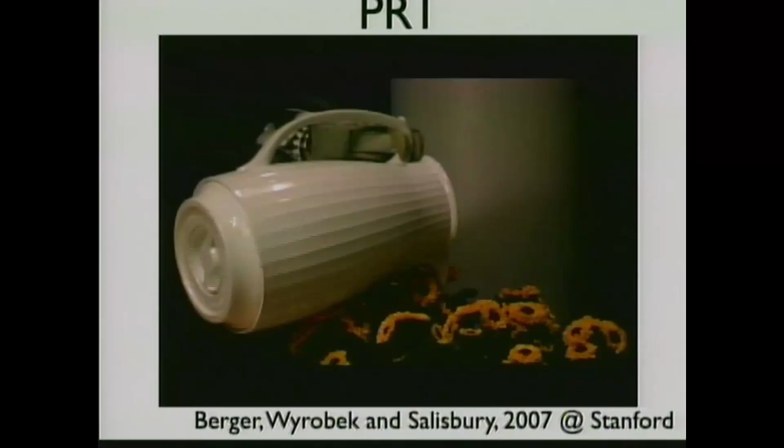So this is an early personal robot. This is actually where we got started in personal robots. This is a robot at Stanford. That was Eric Berger, and in a minute you'll see his partner Keenan Wyrobek. They were in Ken Salisbury's lab over at Stanford. And this is a robot that was created to be a platform on which you could develop software. This is, again, 2007, so about 5 years ago.

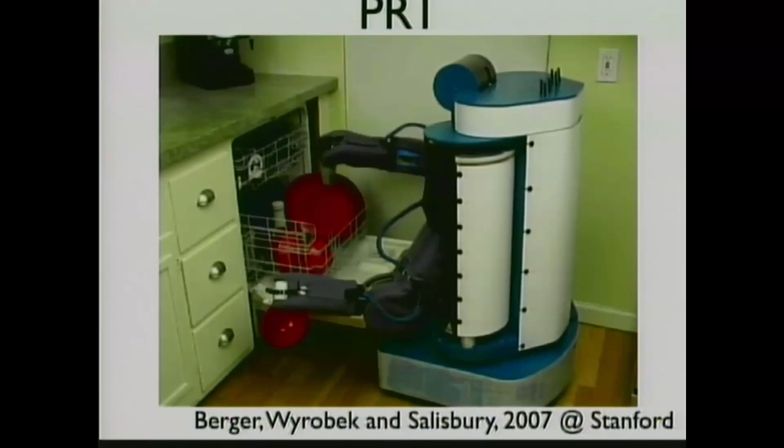And the idea behind this robot - let me say something about it first. You're seeing the robot doing all kinds of humanoid things, so it's practically ready to take over the world. It's actually not. I wouldn't worry too much if I were you.

This robot - this is sped up - was being driven by Eric in the same room. So it's teleoperated, but not only teleoperated, it's same room teleoperated, and that matters a lot. Because situation awareness, if you're trying to teleoperate something 2,000 miles away, is really different than if you can actually hear the crash when you knock something over. And so Eric was teleoperating this.

This, coming up, by the way, is the world's laziest grad student in the most important task any robot can do, which is to bring you a beer.

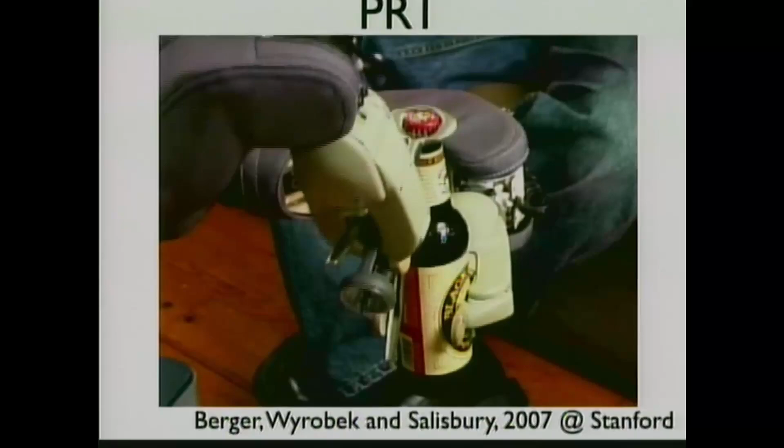This robot was created out of plywood. I have this robot in the lobby at Willow Garage. It was made with laser cut plywood in order to quickly prototype what you could do in hardware. The robot is not autonomous. We call that the PR1. They didn't call it that at the time, but when we named the PR2, we needed to name this one something, so we back-named it PR1.

The vision here was to create a catalyst for innovation. We're trying to create an industry.

The idea that Eric and Keenan and Ken Salisbury had was that in the worst case, this was typical of a robotics PhD program: you cobble together hardware, get motors, get a robot base that some previous grad student built, and figure out how to make it work again. You add an arm if you can. You come up with software, cobble together some open source software, write your drivers. Four years later, you haven't invented anything in robotics, and now it's time to start thinking about your thesis, so you do a little innovation on top of that platform, and then you graduate.

We wanted to invert that. We wanted to make it so you start with a robot that works, software that works. You spend a little time learning it, and then you spend most of your PhD thesis innovating, getting papers out, and making the field go faster. We thought this approach would actually speed things up.

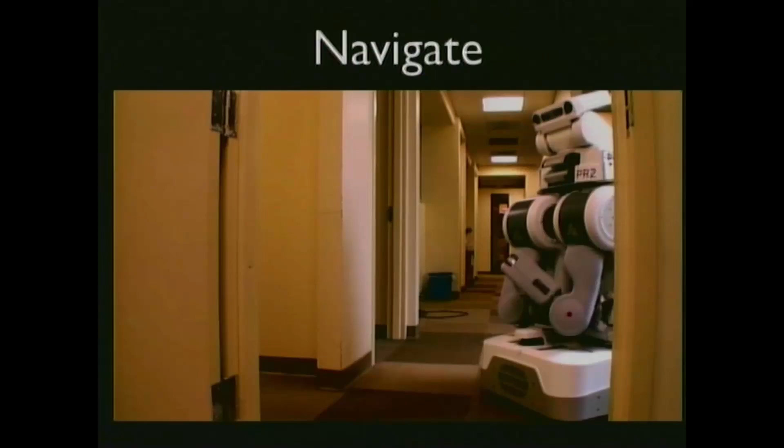Let me show you a little about what these robots can do. Navigation is a fundamental capability for a mobile platform, a mobile robot. Here you see it doing a little test in order to get a paper accepted, so they put some coffee cups on the floor. The robot is running completely autonomously.

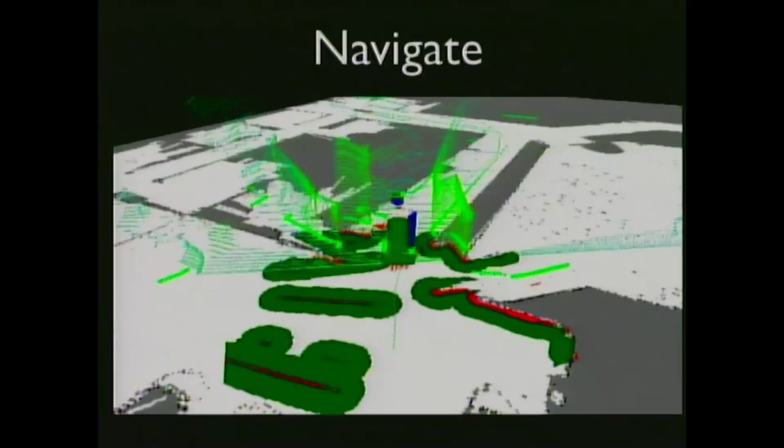We did a milestone at the beginning when we first had the robots moving: can we go 2 pi kilometers? So pi kilometers one day, recharge, next day do pi kilometers again. We thought that would be pretty good. We later did a whole marathon, and that was another task we wanted to accomplish.

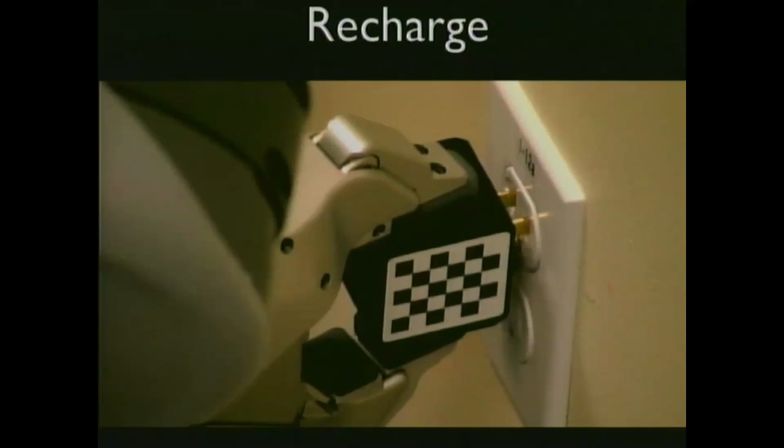How do you know that the arms work? Well, let's see if we can plug ourselves in. So the robot learned how to plug itself in. Turns out plugs aren't designed to be plugged in by a robot this often, so the robot does fine, but we often have to call in an electrician to replace the outlets. Nevertheless, it can recharge itself.

This robot is designed to be ADA compatible, so it goes where wheelchairs can go. It's about wheelchair size, and you don't want it to fall over, so it's this big, and that's kind of big. If you get 9 of them in Willow Garage, they would pretty much fill this stage. They take up space.

So you have to actually think about where you're going to park these things. And you have to plug them all in, and they all suck 15 amps when they first get plugged in, so they have to all be on their own circuits. So we end up putting in a circuit for each robot and a parking space, so there's always a place for it.

With this capability, with navigation and with plugging in, we were able to do what we call continuous operations. We pushed the robot last year to 140 kilometers over 2 weeks of operation. Nobody touches the robot, it goes around the building. We don't engineer the environment in any way, we just ask it: don't hit anybody, don't hit anything. And so it's actually pretty cool.

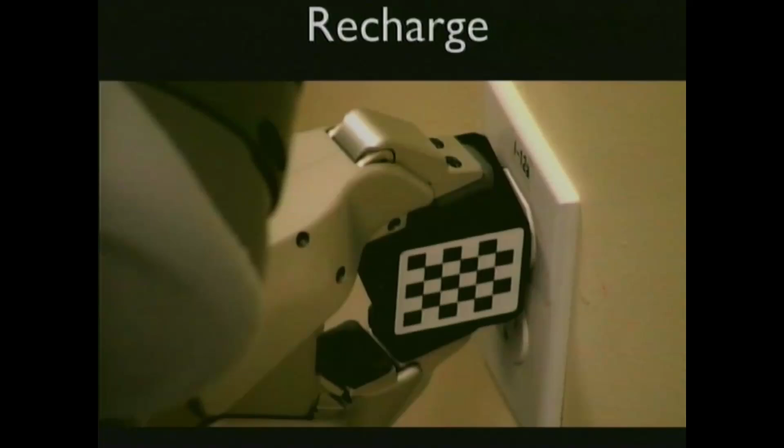The robot's going along, and you jump in front of it, and it stops, or it goes around you. Plans around you. If you block its way, it plans a different path, and so forth. And so it looks intelligent, right? Well, it's not intelligent. It has an algorithm that says the same thing I tell my 16-year-olds learning to drive: don't hit anything. That's the rule. Sense the world, don't hit anything, and then go. And then there's algorithms on top of that to keep track of where you are, plan a path to where you want to be, and then navigate. So that's pretty much what the robot does at the navigation level.

We wanted to see what else we could do. Once we had this platform, this hardware and software platform, we wanted to see what the robot could do, so we gave our team a challenge: you have 1 week to make the robot fetch a beer from a fridge. And so this is what they did.

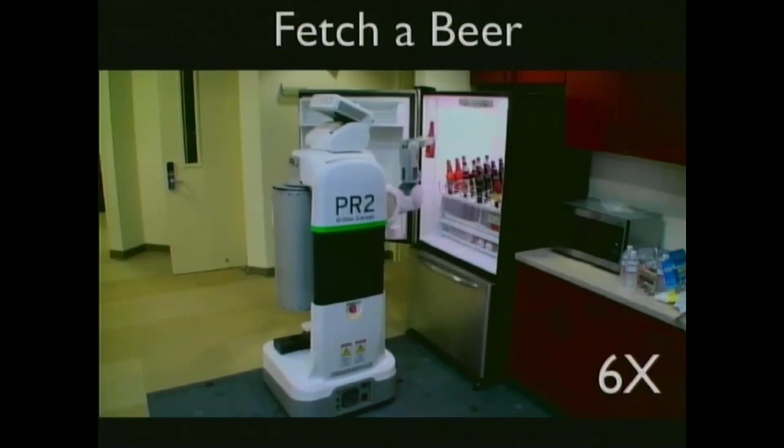They built a web interface. If you select a Guinness from the web interface, it'll choose a Guinness from the refrigerator and take it to you. If you choose a Bud Light, it'll ask you, are you sure you want a Bud Light? And if you say yes, it'll bring it to you. The team added a little cup holder so it can hold the bottles. It also makes sure to close the refrigerator securely—another good thing to teach your kids.

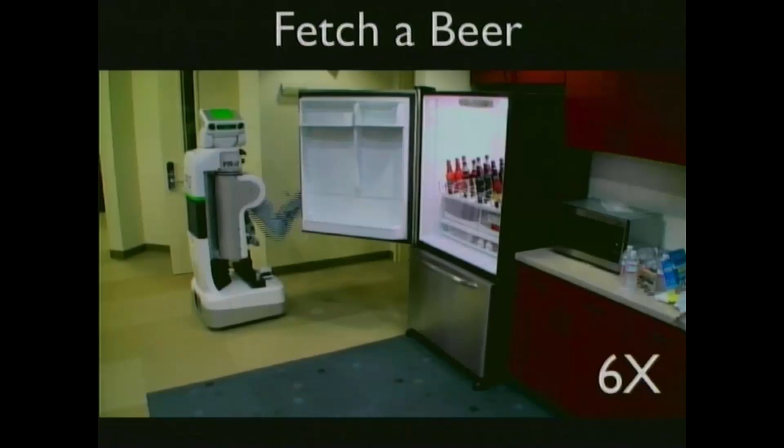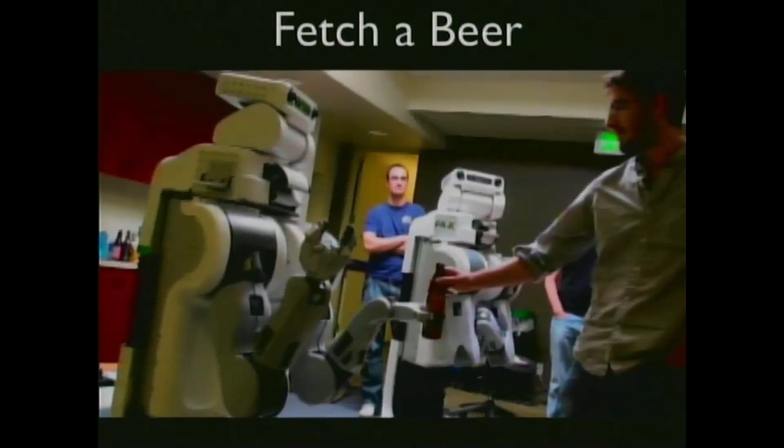This is all just kind of rote programming. Once it knows where the handle is, it just goes through that entire exercise, including finding the right beer, then uses the navigation capability to bring it to somebody, and then handoff. The handoff is actually also hard, because the robot has to know when to let go. So you start talking about robot interaction—that question of when should I let go of the beer. If you let go too early, it's not good.

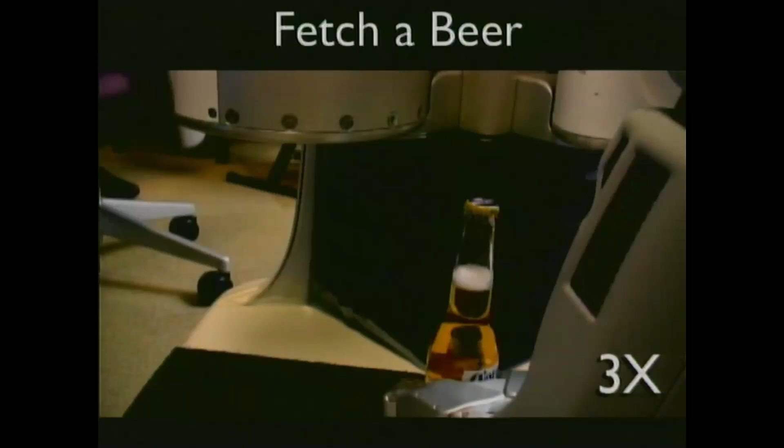This is the same behavior you saw in the PR1 video, but this is autonomous, although not robust. And here's Eitan making a mess.

So we created this hardware, and I'll show you a bit more about the hardware in a bit. We also created this software called the Robot Operating System, or ROS. And the interesting thing is, this is a little old now, but there were 92 repositories by the end of 2010, maybe beginning of 2011, and that's continued to grow.

Those repositories each represent a place in the world, like a university typically, that is creating open source software and contributing it back. The model we had was: we don't want to own the open source software, we want to create this ecosystem of robotic software, and academics need to get credit for what they create—that's part of the deal in academia. So you create a repository, put your software in it, and just tell the ros.org community indexer about your site, and the indexer will go through and make it available to everybody else. That works across our software and lots of other community software, so well over 100 repositories now.

And remember I said we gave away 11 robots, right? So there's us plus 11, that makes 12. That means there's a lot more people using this, and they're not on our robots. And we did, at the end of 2010, start selling robots. We've sold probably twice as many as we've given away, which is not a lot in the scheme of things, but is a lot in terms of the number of great robotics universities in the world.

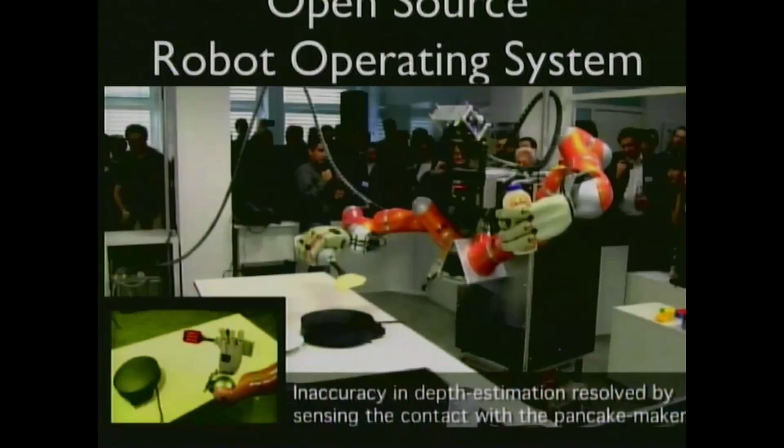This was our robot, the PR2, at the University of Pennsylvania, playing music. This is another robot - those orange things, those orange arms, are called KUKA lightweight robots. And this was an example from Munich, making pancakes.

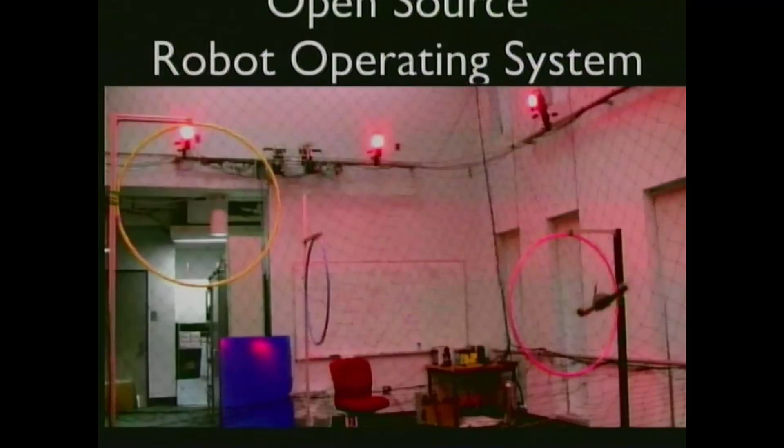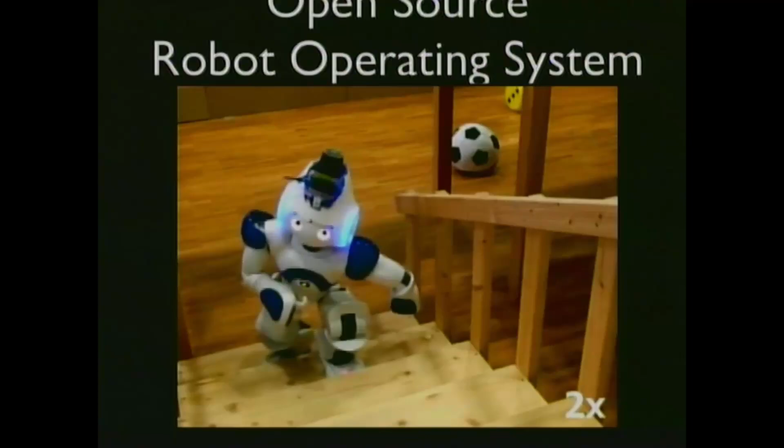Here's robots at the University of Pennsylvania, quad rotors that are doing really cool things with ROS support. This is another arm from Stanford that's made out of plywood. Stanford does things that are not in plywood too, I'll just point that out.

These are PR2 dancing with a robot from Germany called the Care-O-bot. This is a robot that's designed to go in tubes and clean out pipes. This is a car, an autonomous car that's running ROS.

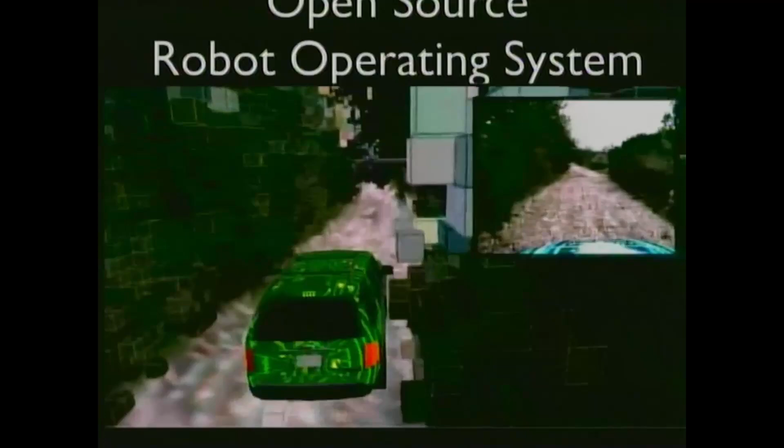You can see some of the visualization tools that it was using in this example. This is a surfboard - the surfboard's not technically a robot, it's hard to know what a robot is, but that's not one. But they put an accelerometer on it and then used the ROS tools to see.

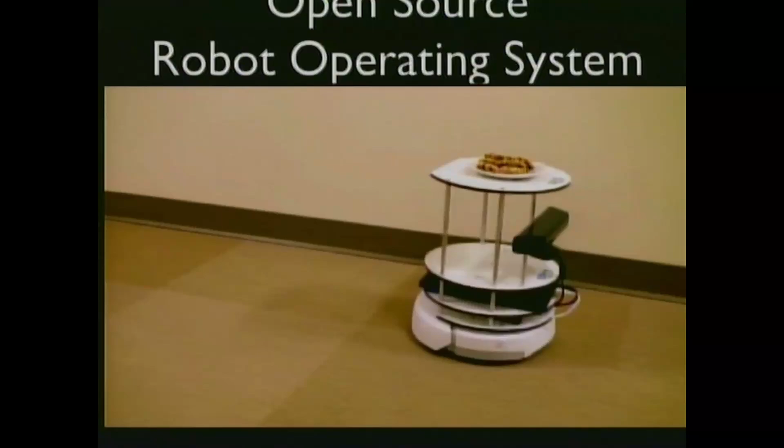This is a TurtleBot - so this is basically a Roomba with a Kinect on it. I'll show you that later a little bit more. Lego robots. This is a PR2 again, and a robot called El-E from Georgia Tech. This is one of those home-built robots, but with a commercial arm designed for research labs.

These are servo bots. A lot of times you see little tiny robots made out of airplane servos. There's a lot of robots in that category, and they can run ROS. So you get an idea.

I need to update this video, because there's a lot more robots, and some of them are really interesting. Like somebody built an artificial rat with whiskers that runs ROS, and I thought that had to be on here.

So Willow Garage as a company, we started 5 years ago, and our idea was, let's be a catalyst to create this new industry. And as I indicated, ROS has been really successful, the robot operating system. The PR2 has been pretty successful too.

Where we want to go now in the next 5 years is, how do we get robots in use? How do we get robots out there among people doing more things? Obviously cost is one big issue, and we're working on that, and lots of other people are too. But I want to give you a little bit more sense about robots and where they might be useful, and what we can do today, because there's a lot of misperceptions about robots.

You know, I hear a lot, and I get asked a lot about our coming robot overlords. I don't really lose any sleep over that, because I get to see robots in the world doing things.

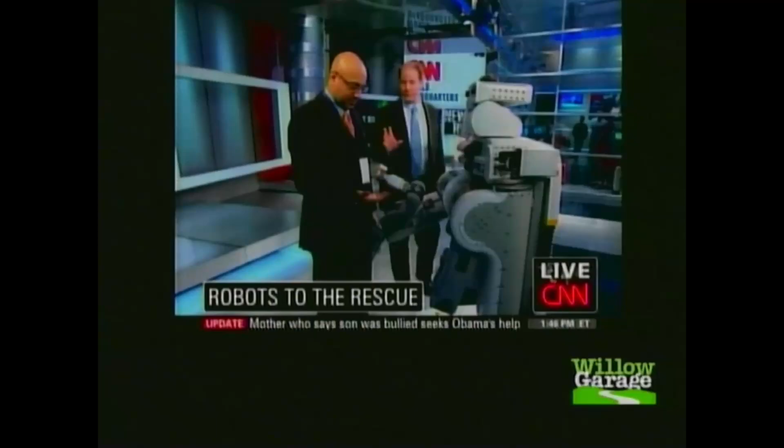But he saw this CNN clip with a PR2, and he said, you know what, I can use that robot to be my external body, to replace my worthless body, as he puts it, which was really exciting.

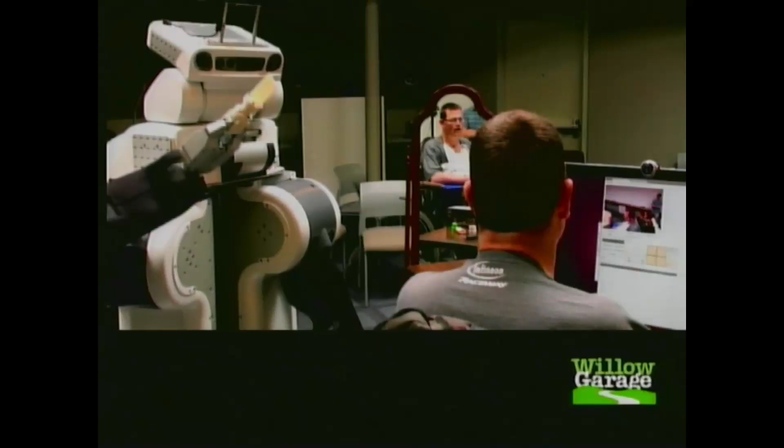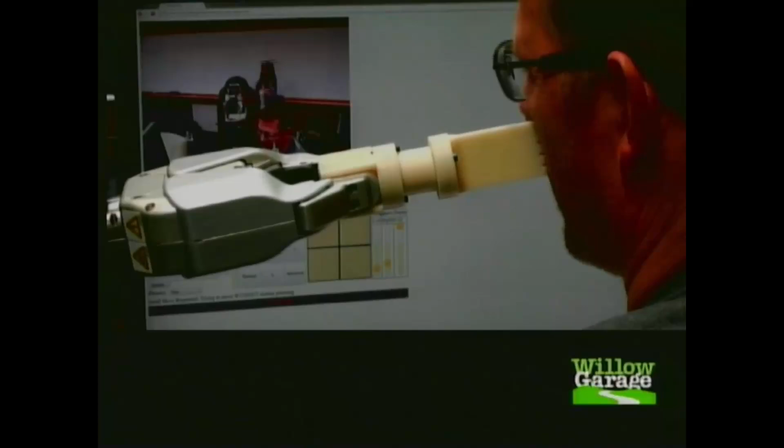We thought he was going to do things like you just saw with picking up things. He's actually controlling the robot in this scene, using a web interface to make the robot do things. The first thing he wanted to do was turn the robot on himself. He brought the arm right up to his face, and we were holding the run stop like, what are you going to do? He wanted to scratch an itch. And then he wanted to shave himself.

We actually did some science here. We tested how hard he pushes using a force torque sensor, and also how hard his wife pushes when she's shaving. It turns out she pushes ten times harder than he does, which may explain why he wants to shave himself.

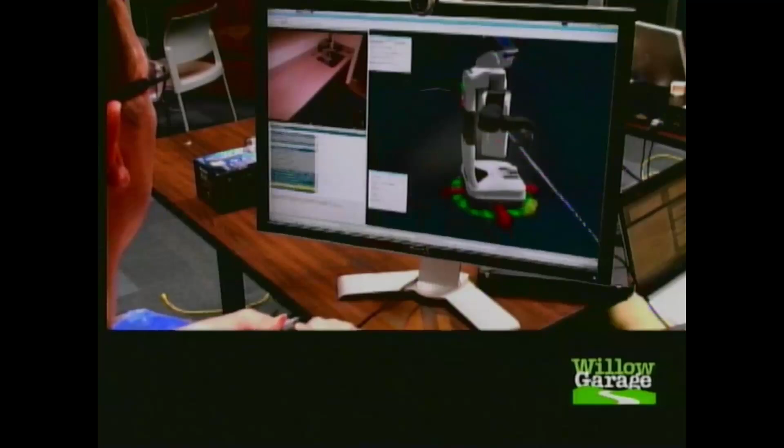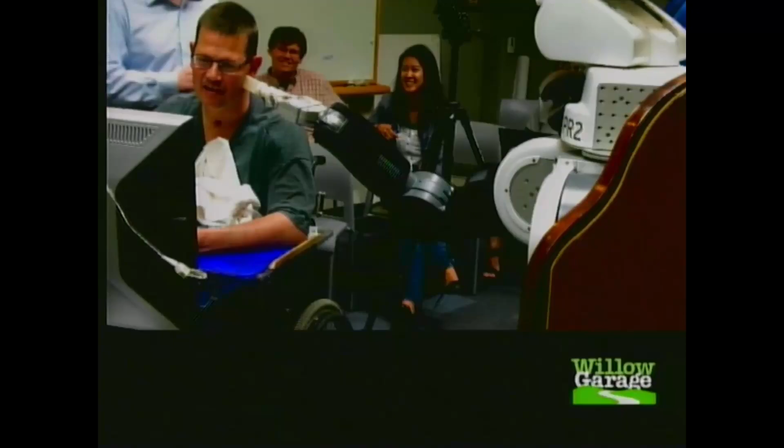He's a delightful man, and he can't speak, so he's basically trapped in his body. Here he's using a robot to go to another room. Remember, in the PR1 it was in the same room. This is him now, using a much less sophisticated user interface, just web clicking, to go to another room and put these objects in a drawer. One of the coolest things he's been able to do is, in his own home, drive the robot from one end to the other, open a drawer, get out a towel, come back, and use it to wipe his face. Think about the amount of dignity he can gain by having control over that kind of operation himself. It's really enormous, and I've been really excited about this project.

He named it Robots for Humanity. It's been a collaboration between us and Georgia Tech, and also Washington University, and Bill Smart there is now at Oregon State University.

So this is at the other end of the cost spectrum. The PR2 is not in Henry's home yet. This is a TurtleBot, and as I mentioned, it's basically built from part of a game machine, the Kinect, and the Create, which is basically a Roomba without the vacuum cleaner - I shouldn't say that - and it has a netbook in it.

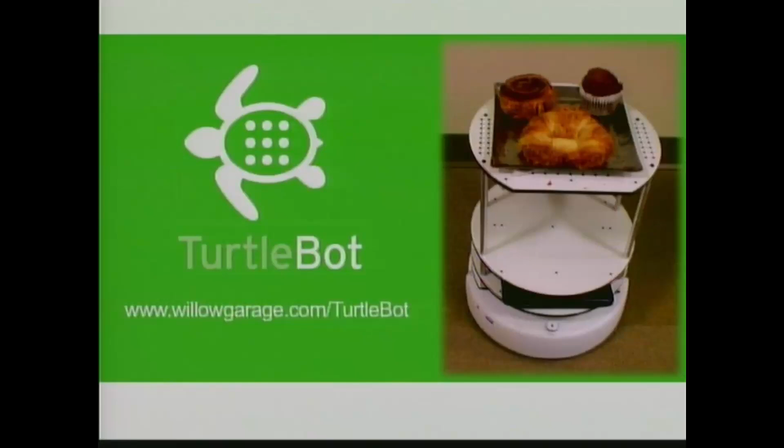The TurtleBot, because it's got the Kinect, is able to do a little bit of skeleton tracking. The cool thing is this is about a $1,500 platform. You can buy it from a company in Canada, or you could build it less expensively if you want. The hardware design is open source, and the software is all open source. People are using this to teach robotics in classes, at least basic navigation things.

One of the things about the PR2 is that you have motors - I don't know how much you guys know about robotics. I always thought, oh, you have motors, you attach a battery, the motor goes, which is true for some motors. But usually you want a motor controller, to control how fast it goes and what kind of torque there is. There's actually substantial electronics involved, and the better the motor, the more sophisticated motor controller you want.

But if you're doing a mobile robot, you really don't want that big piece of hardware. So the idea was to design a very small motor controller board. It's a challenging electrical engineering problem, so we outsourced it to some company. We didn't have anybody besides Kurt who could work on it, and he wasn't ready to do it himself.

And they failed - they couldn't build the board that we wanted. We couldn't find anybody who could build it. Finally, Kurt said, I know this guy in Indiana, he'll do it. So we called him up - his name is Dallas, and he's the one on the screen there.

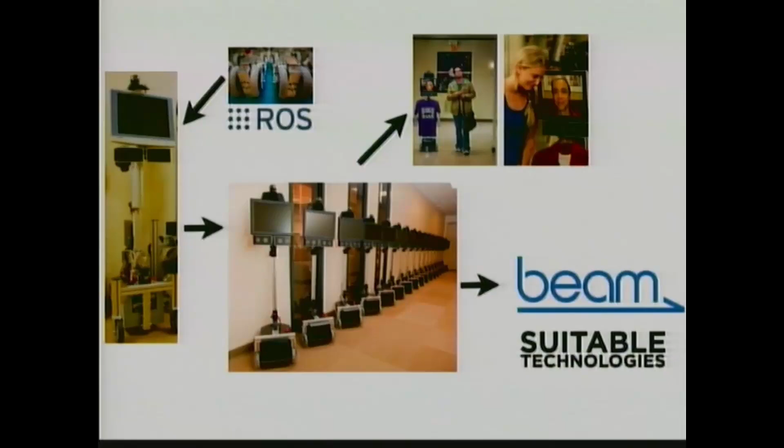And it's a new way. So I think of this as part of this growing industry.

Part of the question people ask me a lot is, well, what's your business model? How does this work, right? One of the things we're doing, in addition to trying to create the next robot that's going to be more widely used than the PR2, is to create spin-off companies in various areas.

In the last two years we've created seven different spin-off companies, Suitable Technologies being the first one and the first one to release a product. There's also a company called Redwood Robotics that we've worked on as a joint venture with Meka Robotics in San Francisco and SRI, which is doing a low-cost arm, because we know from the PR2 experience that the arm is the most expensive part of a personal robot.

We created a company called IPI, Industrial Perception Incorporated. IPI is taking some of the low-hanging fruit from the computer vision field, which has been continually, incrementally improving over the years, and applying it to industrial situations where they can provide the vision component for an industrial robot that's going to try to grab things.

Most industrial robots today are blind, right? They're basically doing rote work, the same thing over and over again. If you start adding sensors—cameras in particular, or 3D sensors like the Kinect or other 3D sensors—suddenly you can automate more of the work in factories, and that's usually pretty boring, redundant work.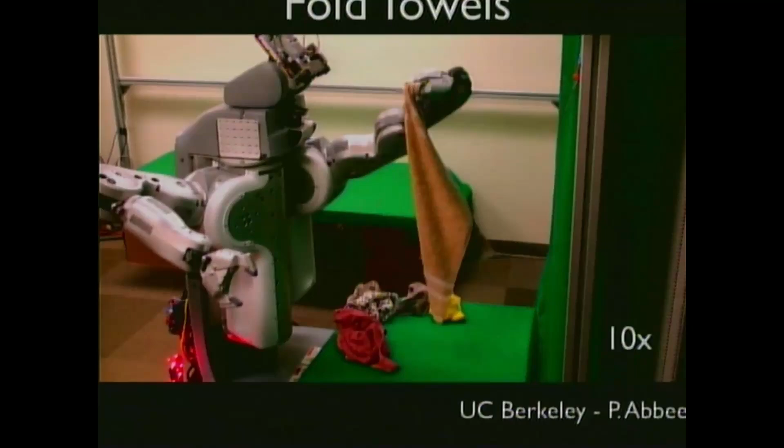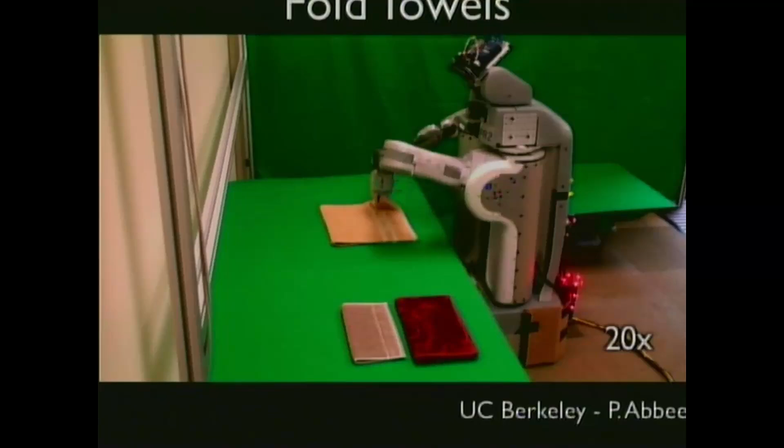What else can we do autonomously? This is probably the most popular PR2 video. This is work that was done at Berkeley, actually done at Willow Garage by Berkeley students before Berkeley had a PR2. And this is folding towels. This has had an enormous number of hits on YouTube, and I'll show you why.

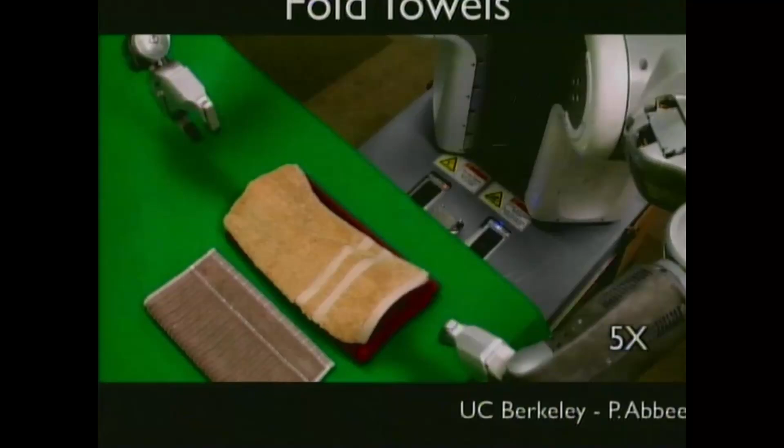Right here, if you're going to do that. And I think that's just like sells the whole YouTube world. It's just so cool.

Now, I don't want you to go away thinking robots can do your laundry tomorrow. This robot retails for $400,000, and it was taking 25 minutes per towel, which is only good if you talk to a reporter who inverts the numbers and says it's 25 towels per minute. Then it's okay, but 25 minutes per towel is not actually a good time. To their credit, they can now do this in 3 minutes per towel, which is 8 times speedup, but still kind of slow compared to how you fold towels, I guess.

But it's a cool application. And the reason this is cool from a robotics point of view is, again, robotics is a lot about mathematics and modeling the world, and grad students in robotics are really good at that. This is a challenging problem. There's no good model for that towel. It's just soft, it's just a blob.

So they use a theorem, an actual towel folding theorem. I'm going a little bit off from HCI, but it's kind of fun. If you grab a towel, hold it up and shake it, the lowest point is guaranteed to be a corner. If you grab that corner, hold it up, shake it, that gets you the opposite corner. So you get 2 opposite corners, and if you put it on a table with a big enough wingspan, you get this kind of zigzag. And the whole problem is figuring out which of those 2 triangles is on top.

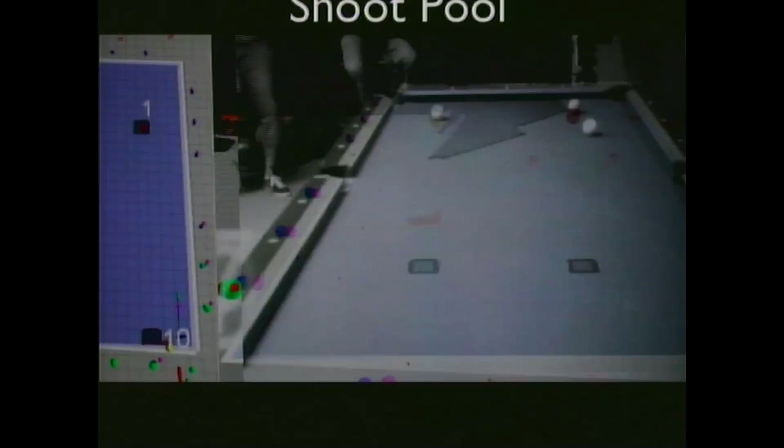Here's another really fun one. This was another hackathon, another one-week challenge to the team: can you make the robot play pool in one week? What you're seeing is the robot. We added a little stick to it, and a little hinge mechanism.

The arms aren't really fast enough, they're not designed to move fast because they want them to be safe around people. So this hinge mechanism lets you use the wrist to get some torque and some speed on the stick.

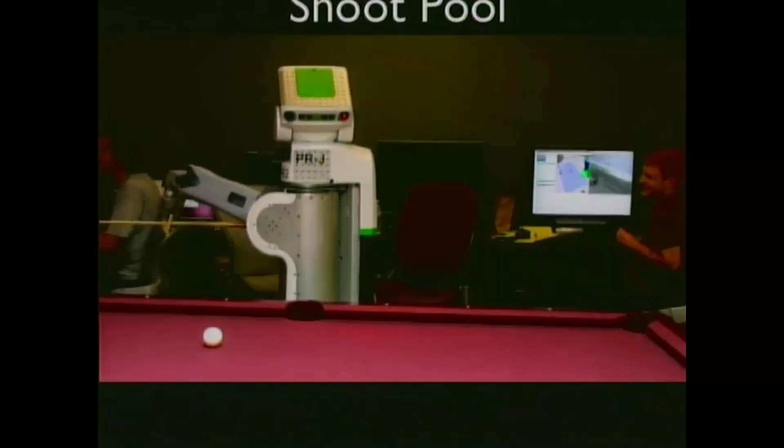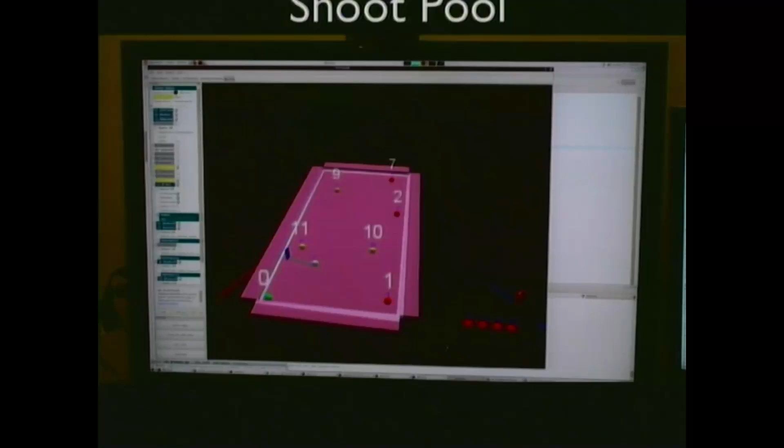The other cool thing is, when they looked at the problem, they said, well, we're going to use this open source pool physics simulator we found on the net. That's this thing on the left. If you give that simulator a model of the table, where all the balls are, where the pockets are, it'll do a search through all possible places you could put the cue ball and tell you the shot you should take.

Now that's a first shot that didn't work. Here you see balls going in, and by the end of the week we had it doing shots like this, and nice angle shots like that. We said that's pretty darn good. So we went from a place where it used to take a grad student four years to get a robot up and working, to where suddenly in a week, a team of eight trained people can do a brand new task from scratch. We were pretty excited about that.

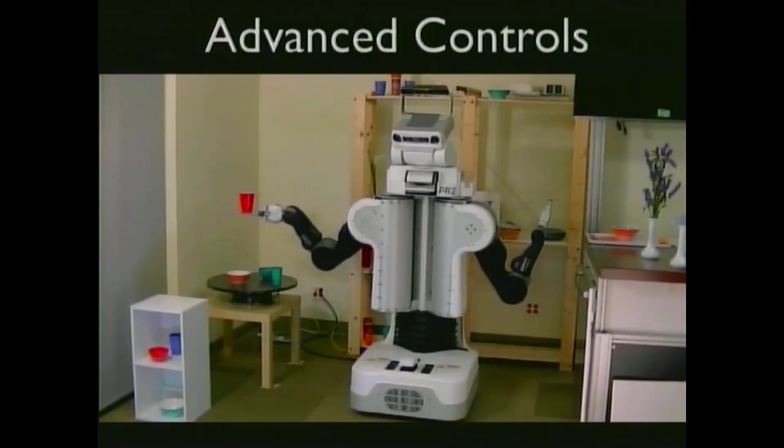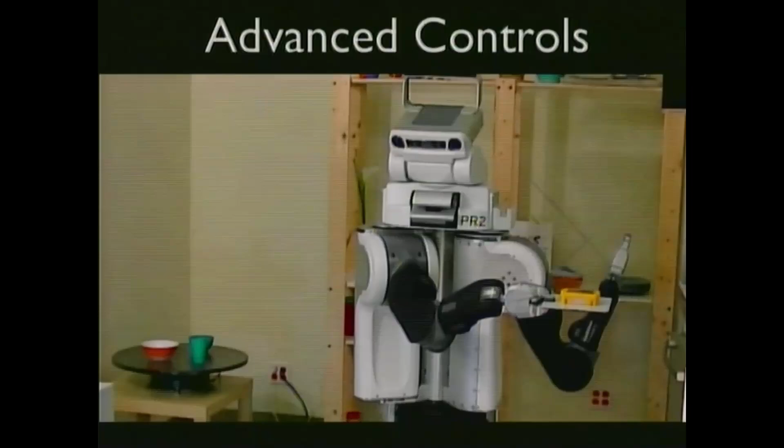So this is also really cool. This is a grad student from Georgia Tech, and he's got a robot just standing there, moving a glass from one point to the other. It's kind of a cool thing to move it back and forth, but it's not rocket science until you realize he's moving it kind of fast, and that one's full of water.

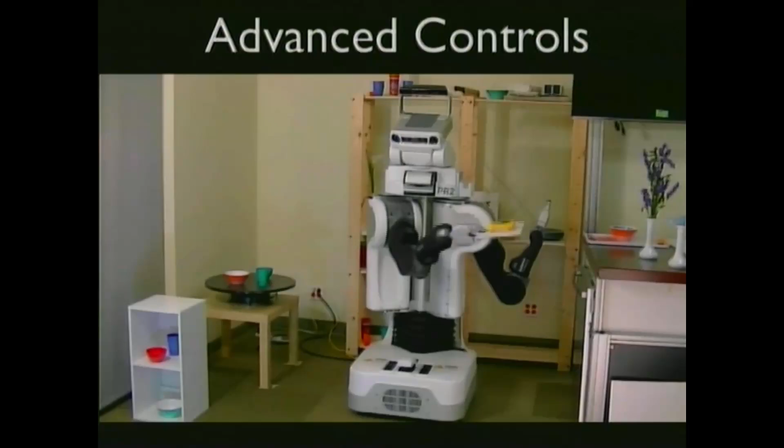In this one he does use his algorithm, he's tilting very subtly as he moves. The robotics grad student approach is to think about this mathematically: when I start to move this way, there's a force on the object going the other way. If I tilt a certain amount, I can counter that force dynamically. You do that mathematical modeling, and then you can just do this thing all day long. As long as the robot is fast enough, precise enough, and responsive enough, you can hold something on a slippery surface without spilling it, or carry a glass full of water.

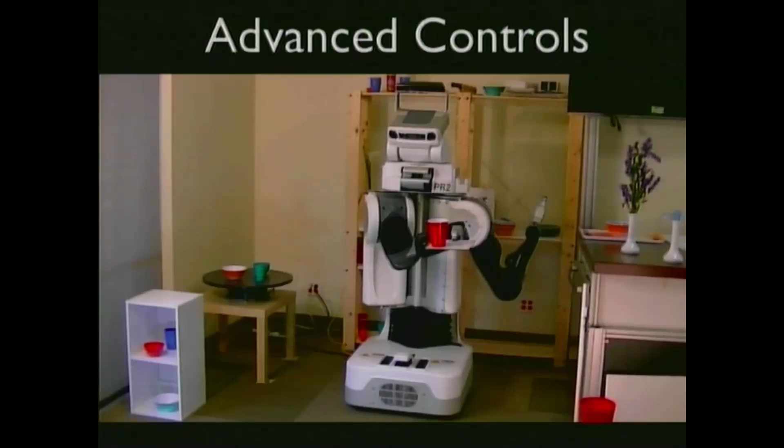So when I talk to students about robotics, I usually point out there's a lot of cool math involved, and you get some pretty good value out of learning it. Let me give you one example of how it works. This is what the robot's seeing inside as it tries to pick up an object.

If you put this bottle on a table and have the robot pick it up, we're pretty proud of this. It's building those lines you're seeing using its tilt laser, building a 3D map of what's on the table in front of it, segmenting the objects from the table, and then identifying those objects.

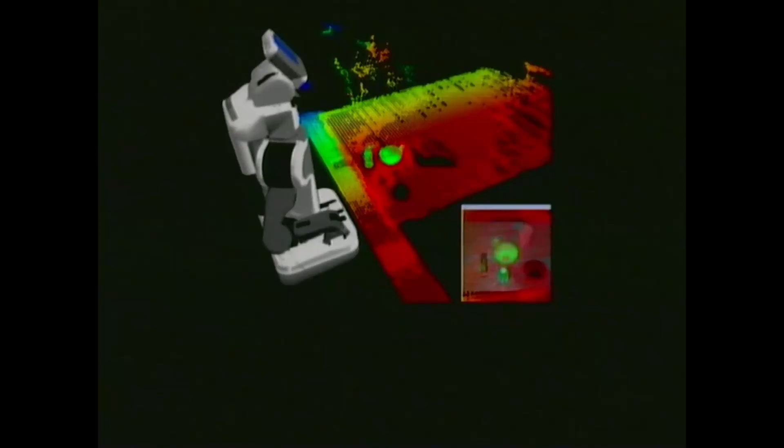Once you have an object identified, you have to grasp it. What you see jumping around in front is a simulated gripper trying all different grasps to figure out the best way to grab an object, because you don't necessarily want to grab it this way, this may be a better grasp.

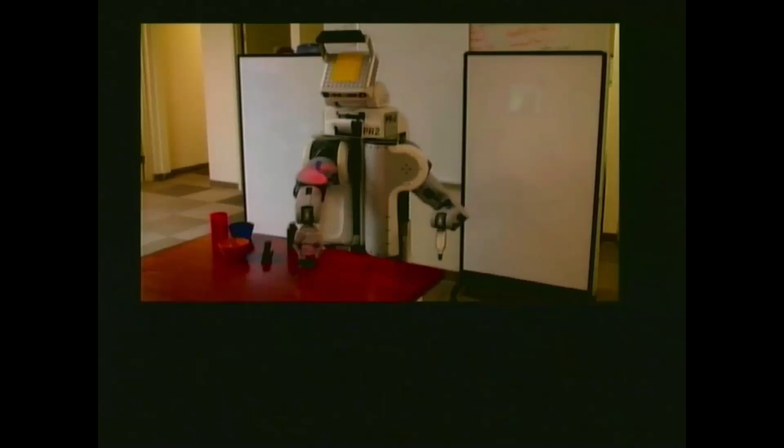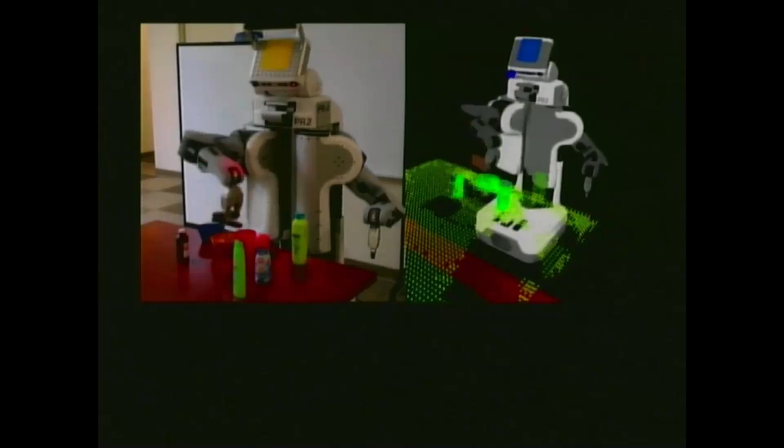Once you've picked up the object, you want to make sure that as you move, you don't hit something. So here it's picking up an object and moving it without hitting the other objects on the table. That requires a planner, and it turns out that planning problem is NP-complete, so you have to do simulations and estimations, stochastic simulations, to figure out where you want to move.

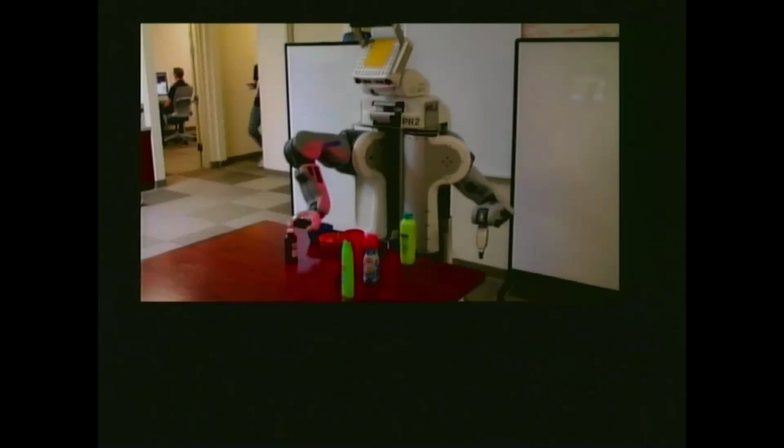And then sometimes there's sensor error, so you don't know exactly where the gripper is. If you misgrasp, in this case they move the object on purpose, the robot will actually feel where it missed the grasp and move its gripper to the right place.

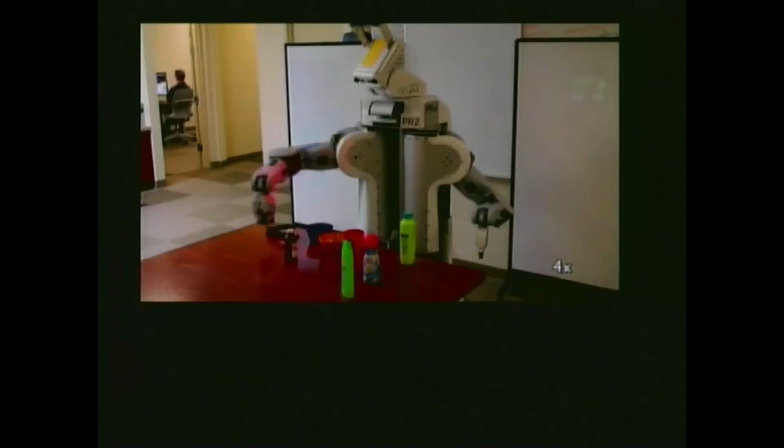So here's a complete pick and place action, right? Basically pick something up, make sure you got a good grasp of it, and then move it back. You'll notice that the robot sped up 4 times.

To watch this in real time is a little bit painful, right? Robots aren't that fast. Robots that are sensing their environment and reasoning about them and acting on it are not that fast today. There's a lot of compute power. The PR2 has 2 basically Mac Pros in its base, has i7 processors, 8 cores in each computer, so 16 total cores, 48 gigabytes of total RAM, a couple terabytes of disk. It's a pretty beefy system inside there, and it's running like crazy to try to make these algorithms work. So there's a lot of room before the robot overlords get here.

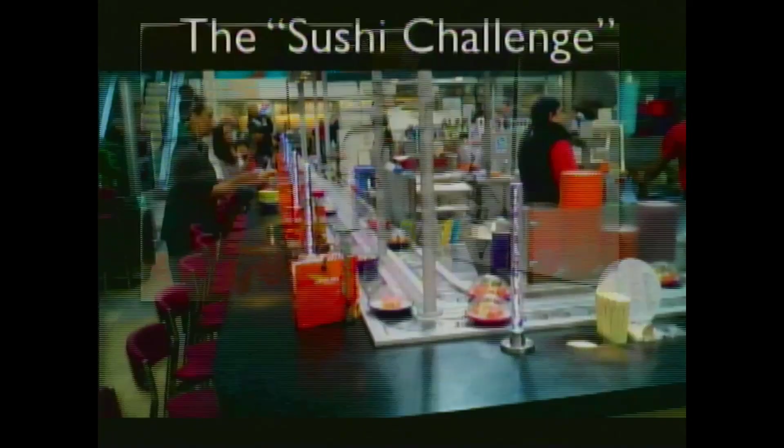We did something called the Sushi Challenge. The Sushi Challenge, this is just a sushi restaurant in London. Here's an example of the robot trying to pick something up off of a moving table.

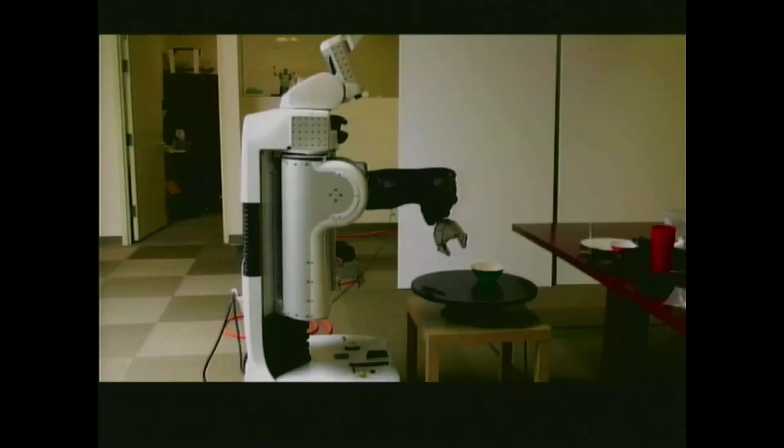And again, this is one of these, we thought this was going to be hard. We thought that picking up an object from the moving table was a task that was hard, because usually you watch a robot in action and it sits, thinks, and finally starts to move and grab something. Well, if the world's moving, what are you going to do? That problem, and I cut the video badly because you didn't get to see it actually grab it.

But in this case, what happens again, the smart mathematically oriented grad students say, oh, we can model the motion. It's just one more degree of freedom in the way we represent the world. So it's easy, so we model it mathematically, and then we watch for a while, we have our model, we just grab and pick it up. For a while still means like 30 seconds to a minute, so it's kind of still slow to watch, but things are getting faster.

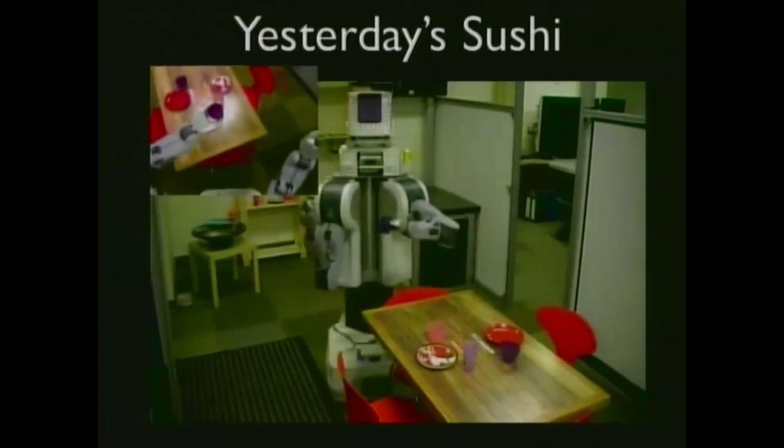And then there's this area between the demos and total autonomy. This is us doing this sushi challenge. The sushi challenge is to clear this table in the front, move all the dirty dishes over to the dirty dishes area, which is in the corner there, go to the clean dishes area, get new plates, set the table, and then go to the rotating table and pick something up, right?

And so the first time we tried this with human in loop. So we have a teleoperator using a web interface and trying to do this task. And you can see, I can tell by watching this that that's a person doing this. It's not, the robot doesn't just grab it. It's actually like moving things, moving it to the edge of the table to make its job easier. Robots don't plan that way.

Picking up the chopsticks ends up being a challenging part. You have to get the gripper just right. This is something that actually the robot would do autonomously, would probably do better than a person, figuring out how to exactly get the gripper there.

And setting the table ends up being reasonable, although the challenge here is not what we expected. The challenge here is you have stacks of plates, and grabbing just one plate is really hard for these little parallel jaw grippers, right? If you had a full functional hand, like a human hand, and a lot of training, you could teach it how to do what we do, right? We grab it, we kind of pull it with our thumb, we can take the object out.

But that's hard to program, and not only that, it's really hard to build that hand in such a way that it's robust. So there are some robotic hands out there, fully featured, but they don't tend to last that long in practice if you're going to work with them. So these parallel jawed grippers tend to be like the simplest thing ends up being the best thing, the easiest thing to maintain. Here you see it actually taking the extra plate that it grabbed back.

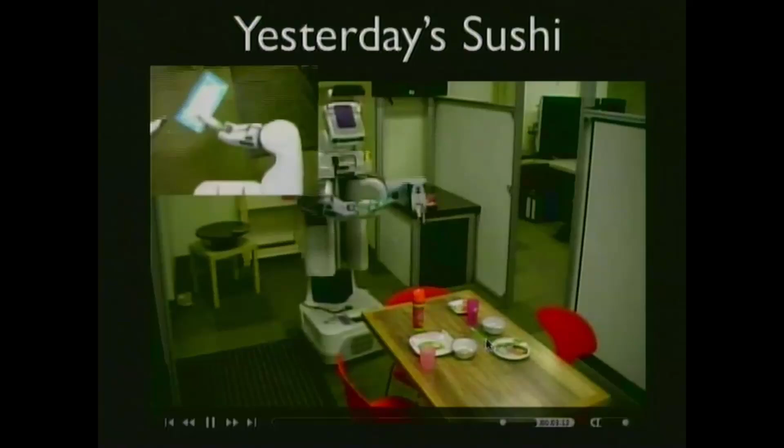It took him 40 minutes to do this task. This video is sped up. If I asked you to do this task, it would take you about a minute and a half, right? So we've got a ways to go, even on the teleop side.

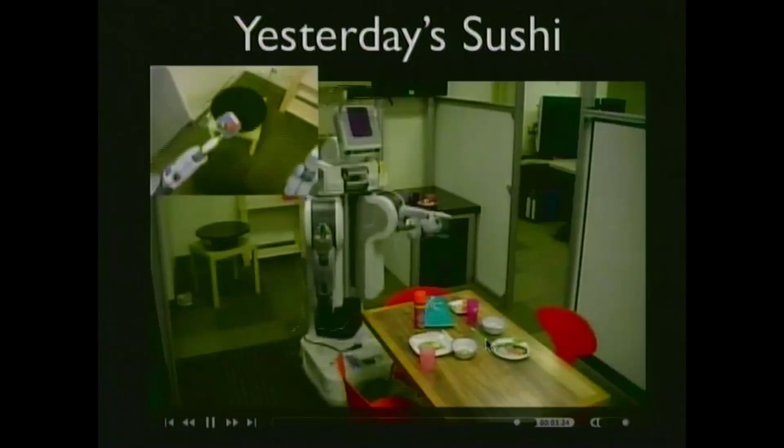Simplifying the problem a little bit, basically doing objects that were easier for the robot to recognize, we were able last April at the big robotics conference in Minneapolis to do this entire task autonomously in 30 minutes. So that's not bad. It's not good, but it's not bad, right? It's sort of coming in the right direction.

And it was actually kind of a tour de force for autonomy. So I wanted to give you a sense of where we are in the world.

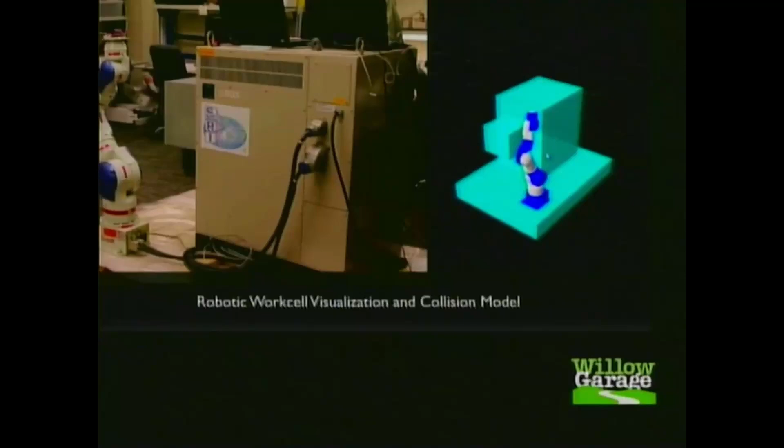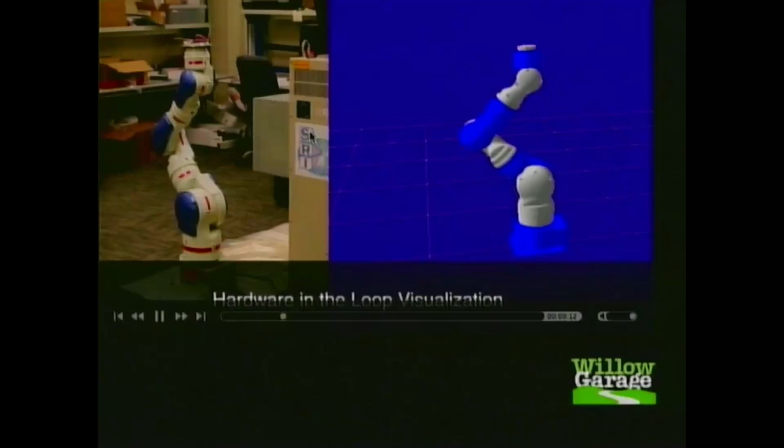Let me show you, this is the other thing that's happened with the robot operating system. That's one of those big controllers I was mentioning. This is an industrial robot arm here, and one of the big controllers next to it. But now they're running ROS, the robot operating system, on these industrial robots, which is a big breakthrough in industrial robots, because suddenly it makes it much easier to program the robot.

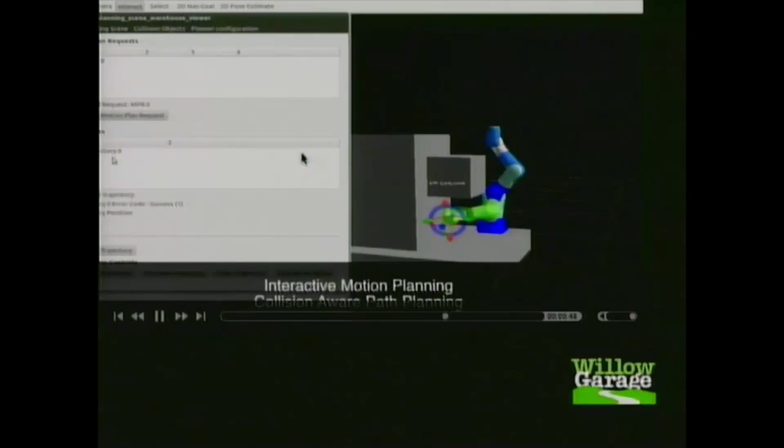I look at this video, and you probably look at it too, and go, so what did you do? You got it to move from up here to down there, and that was hard? And the answer is, yeah, it was actually hard. Before, people would take a long time making sure you didn't crash into the side of the controller. Now with the software, it can basically do that planning and do it automatically. And if you're in industrial robotics, apparently you get excited about this.

We've already had a little incursion into personal robots, right? Roombas are arguably robots. They move around in the world and they do something, and there's like 7 or 8 million of them out there. And there's an interesting phenomenon around Roombas. They not only exist in the world to vacuum, but people name them. Something like 40 or 50% of the people who have Roombas name them, which is shocking. Shouldn't be shocking, I guess, but it is.

There's a wave coming, which is these remote presence devices that I showed you. And I think that's going to be really exciting.

The reason is, if you think about somebody who has to travel, like I used to work for IBM and I had to go to New York about 6 or 7 times a year. And every one of those trips cost me, or cost the company out of my travel budget, $1,500 to $2,000. So you do the math and say, I'm traveling 7 times a year, it's going to cost $10,000 to $15,000. If 2 people are doing that, suddenly I could just buy one of these remote presence devices and have it there. If that could reduce it so I could only go twice a year instead of 7 times, and go with the robot instead, suddenly that thing just pays for itself out of my travel budget. Whenever you have a business case where you can say where the money's coming from and who wants it and why, I think you have a pretty good business case.